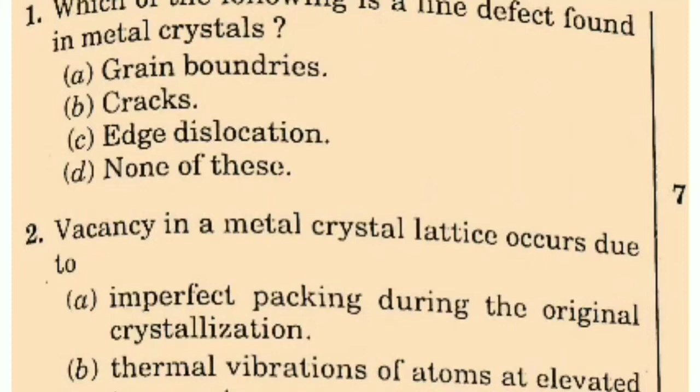Next, vacancy in a metal crystal lattice occur due to imperfect packing during the original crystallization, thermal vibration of atom at elevated temperature, or C both A and B, D neither A nor B? इसका सही आंसर है दोस्तों C, both A and B। Vacancy in a metal crystal lattice occur due to imperfect packing during the original crystallization, and thermal vibration of atom at elevated temperature।

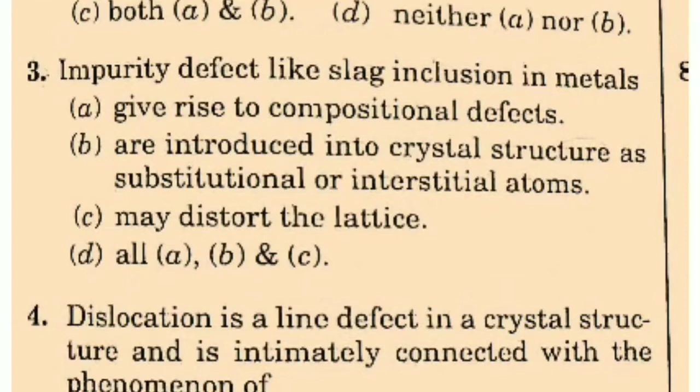Next, impurity defect like slag inclusion in metals give rise to compositional defect: are introduced into crystal structure as substitutional or interstitial atom, or C may distort the lattice, or D all of above? इसका सही आंसर है दोस्तों D, all of above। Impurity defect like slag inclusion in metal give rise to compositional defect, are introduced into crystal structure as substitutional or interstitial atoms, and may distort the lattice।

Next, dislocation is a line defect in a crystal structure and is intimately connected with the phenomenon of slip, strain hardening and creep, fatigue and brittle fracture, or D all of above? इसका सही आंसर दोस्तों all of above। Dislocation is a line defect in a crystal structure and is intimately connected with the phenomenon of slip, strain hardening and creep, fatigue and brittle fracture।

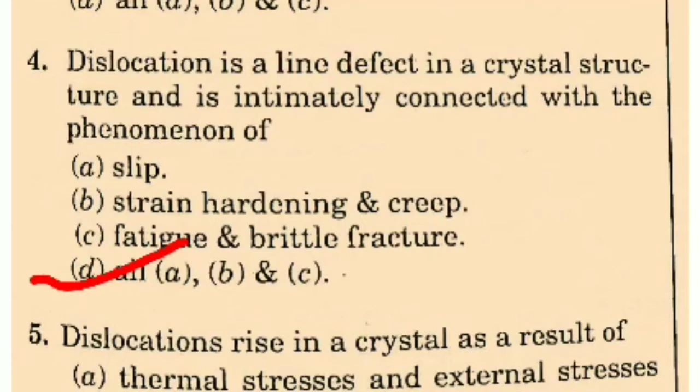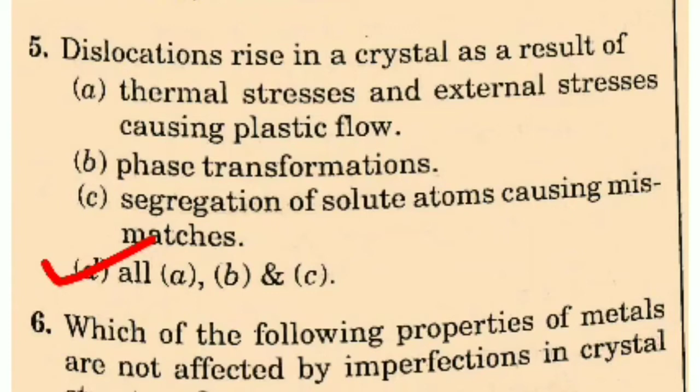Next, dislocation rise in a crystal as a result of thermal stress and external stress causing plastic flow, B phase transformation, C segregation of solute atom causing mismatch, or all of above? इसका सही आंसर है दोस्तों all of above। Dislocation rise in a crystal as a result of thermal stress and external stress causing plastic flow, phase transformation, and segregation of solute atom causing mismatches।

Next, which of the following properties of metals are not affected by imperfection in crystal structure? Plastic and creep characteristics, thermal and electrical conductivity, flow fracture and corrosion characteristics, or none of these? इसका सही आंसर है दोस्तों none of these।

Next, substitutional solid solution forms when the solute atom are very small compared to solvent atom, B solute and solvent atoms possess almost equal diameters, C solvent atoms are very small compared to solute atoms, or none of these? इसका सही आंसर है दोस्तों B, solute and solvent atom possess almost equal diameter। Substitutional solid solution forms when the solute and solvent atoms possess almost equal diameter।

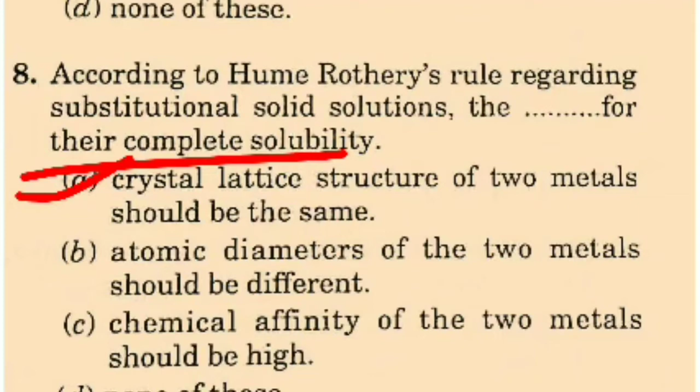Next is, according to Hume-Rothery's rule regarding substitutional solid solution, the dash for their complete solubility: A crystal lattice structure of two metals should be the same, atomic diameter of the two metals should be different, chemical affinity of the two metals should be high, or none of these? इसका सही आंसर है दोस्तों option A। According to Hume-Rothery's rules regarding substitutional solid solution, the crystal lattice structure of two metals should be the same for their complete solubility।

Next, metals with large valence electrons dash with a lower valence metal: have poor solubility, have very good solubility, are completely miscible, or are completely miscible only when the crystal lattice structure of the two metals are same? इसका सही आंसर है दोस्तों option A। Metals with large valence electrons with a lower valence metal have poor solubility।

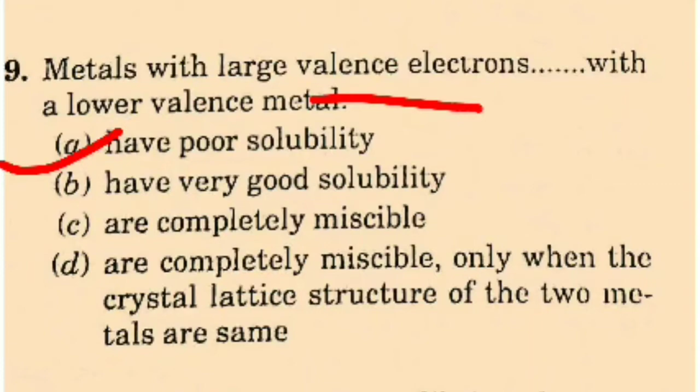Next, the line or surface in an equilibrium diagram which indicates the temperature of the beginning of solidification or completion of melting is called the dash temperature: solidus, liquidus, solidification, or melting? इसका सही आंसर है दोस्तों B, liquidus। The line or surface in an equilibrium diagram which indicates the temperature of the beginning of solidification or completion of melting is called the liquidus temperature।

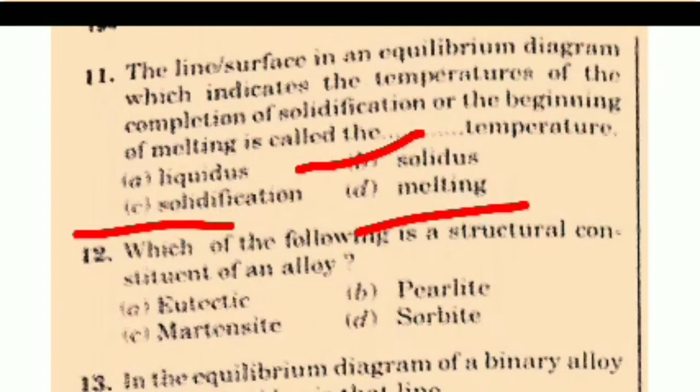Next, the line or surface in an equilibrium diagram which indicates the temperature of the completion of solidification or the beginning of melting is called the dash temperature: liquidus, solidus, solidification, or melting? इसका सही आंसर है दोस्तों option B, solidus। The line or surface in an equilibrium diagram which indicate the temperature of the completion of solidification or the beginning of melting is called the solidus temperature।

Next, which of the following is a structural constituent of an alloy? Eutectic, pearlite, martensite, or sorbite? इसका सही आंसर है A, eutectic। Which of the following is a structural constituent of an alloy? इसका सही आंसर है eutectic।

Next, in the equilibrium diagram of a binary alloy system, liquidus is that line where solidification completes, where solidification starts, above which the alloy is in liquid state, or both B and C? इसका सही आंसर है all of B, both B and C।

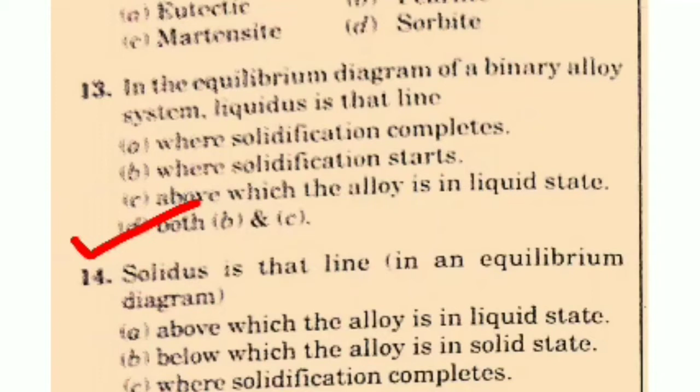Solidus is that line in an equilibrium diagram below which the alloy is in solid state, where solidification completes.

Next, which one involves a solid transformation? Eutectic, perlitic, eutectoid, or none of these. The correct answer is eutectoid. Which one involves a solid transformation? The correct answer is eutectoid.

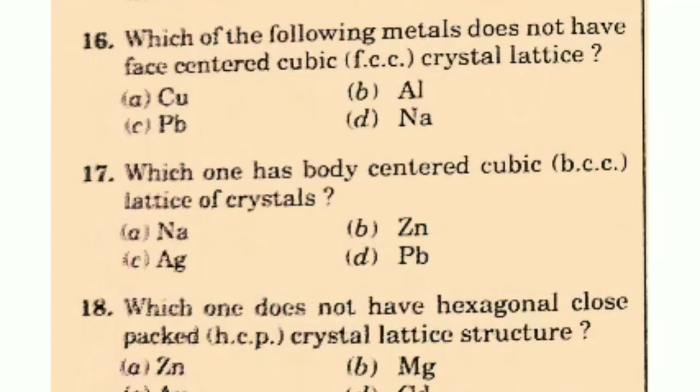Next, which of the following metals does not have face centered cubic FCC crystal lattice? Copper, aluminium, PB, or Na? The correct answer is D, sodium. Which of the following metal does not have face centered cubic FCC crystal lattice? The correct answer is Na.

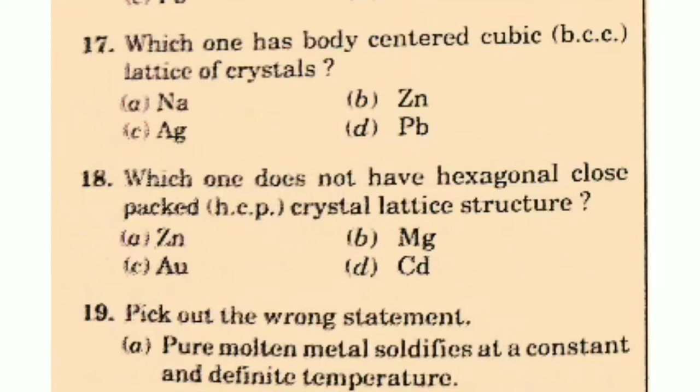Which one has body centered cubic BCC lattice of crystal? Na, Zn, Ag, or Pb? The correct answer is option A, Na. Which one has body centered cubic BCC lattice of crystal? The correct answer is sodium.

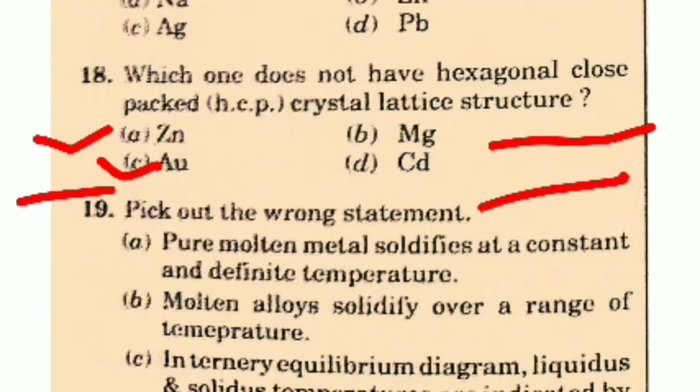Next, which one does not have hexagonal close packed crystal lattice structure? Zn, Mg, Au, or Cd? The correct answer is C, Au. Which one does not have hexagonal close packed crystal lattice structure? The correct answer is C, Au.

Pick out the wrong statement. A. Pure molten metal solidifies at a constant and definite temperature. B. Molten alloy solidifies over a range of temperature. C. In a ternary equilibrium diagram, liquidus and solidus temperature are indicated by surface, not by lines. Or D, none of these. The correct answer is D, none of these.

Pick out the wrong statement. Pure molten metal solidifies at a constant and definite temperature. Molten alloy solidifies over a range of temperature. In a ternary equilibrium diagram, liquidus and solidus temperature are indicated by surface, not by line. The correct answer is none of these, D.

Next, allotropic forms of metal have the same physical properties, crystal structure, or both A and B? D, neither A nor B. The correct answer is neither A nor B, option D. Allotropic forms of metal have the same physical properties, crystal structure. The correct answer is D, neither A nor B.

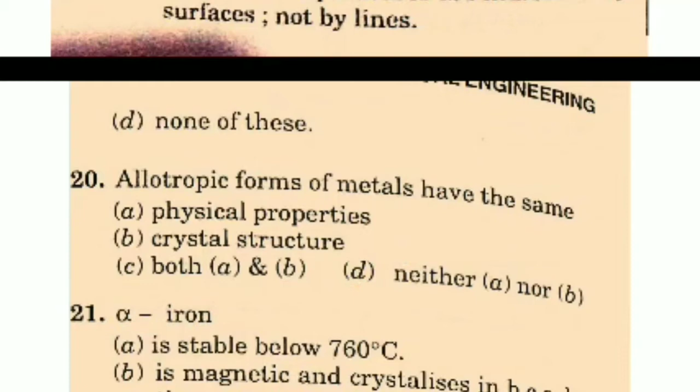Next, alpha iron is stable below 760 degrees centigrade, is magnetic, and crystallizes in BCC lattice. It has only 0.025% solubility for carbon. The correct answer is all of the above. Alpha iron is stable below 760 degrees centigrade, is magnetic and crystallized in BCC lattice. It has only 0.025% solubility for carbon.

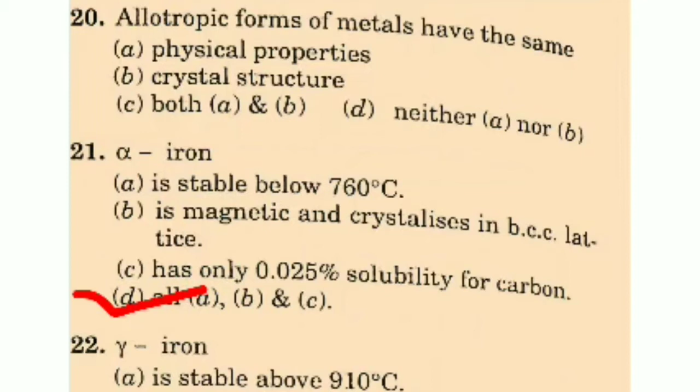Next, gamma iron is stable above 910 degrees centigrade, is non-magnetic and has FCC lattice. It can hold up to 2% carbon in solution. The correct answer is D, all of the above.

Gamma iron is stable above 910 degrees centigrade, is non-magnetic and has FCC lattice. It can hold up to 2% carbon in solution. The correct answer is all of the above.

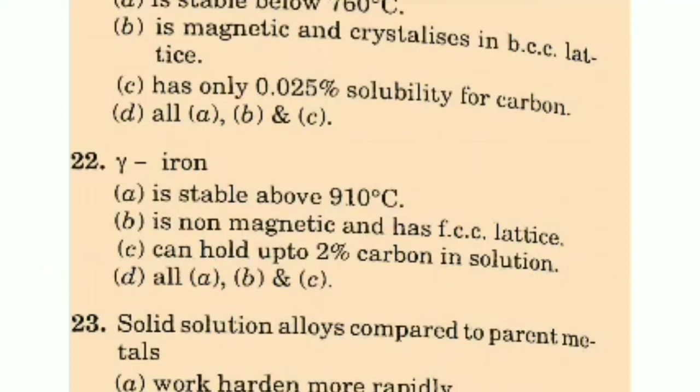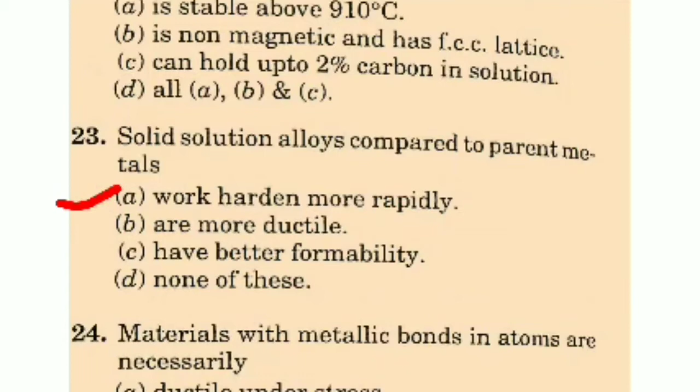Solid solution alloy compared to parent metals: work harden more rapidly, more ductile, have better formability, or none of these? The correct answer is option A. Solid solution alloy compared to parent metals work harden more rapidly.

Materials with metallic bonds in atoms are necessarily ductile under stress.

Next, solids having covalent bonds have high electrical conductivity, low electrical conductivity, high hardness, or both B and C. The correct answer is D, both B and C. Solids having covalent bonds have low electrical conductivity and high hardness.

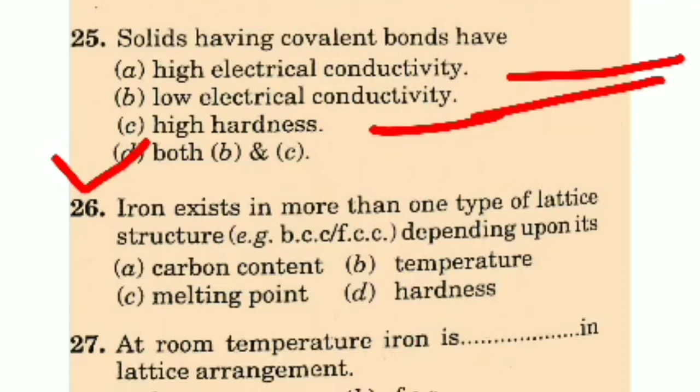Next, iron exists in more than one type of lattice structure, that is BCC or FCC, depending upon its carbon content, temperature, melting point, or hardness. The correct answer is option B, temperature. Iron exists in more than one type of lattice structure, that is BCC or FCC, depending upon its temperature.

Next, at room temperature, iron is dash in lattice arrangement: BCC, FCC, HCP, or none of these. The correct answer is BCC. At room temperature, iron is BCC in lattice arrangement.

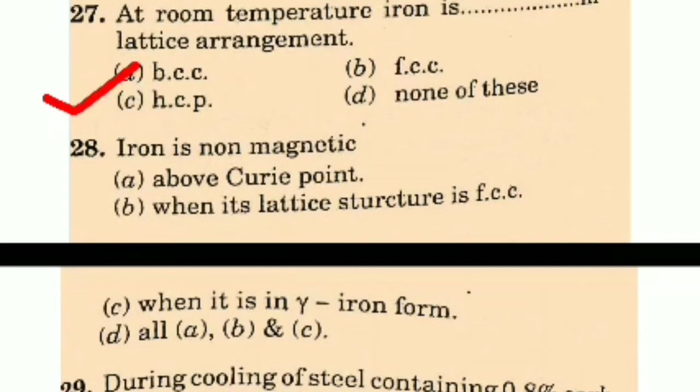Next, iron is non-magnetic above the Curie point when its lattice structure is FCC, when it is in gamma iron form, or D, all of the above. The correct answer is all of the above.

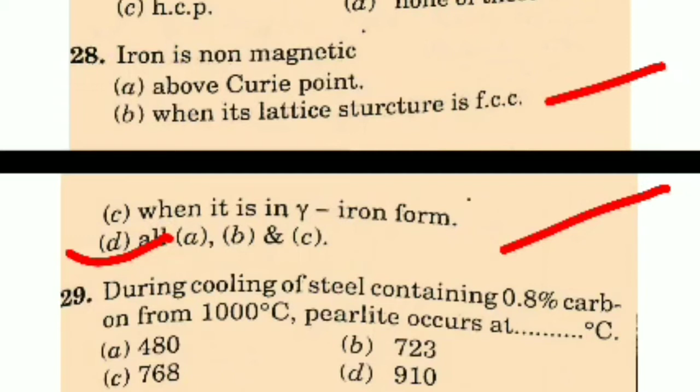Iron is non-magnetic above Curie point when its lattice structure is FCC, when it is in gamma iron form.

During cooling of steel containing 0.8% carbon from 1000 degree centigrade, pearlite occurs at what temperature: 480, 723, 768 or 910? The correct answer is 723. During cooling of steel containing 0.8% carbon from 1000 degree centigrade, pearlite occurs at 723 degree centigrade. Next, nodular iron has got very high tensile strength of the order of how many kilograms per centimeter square?

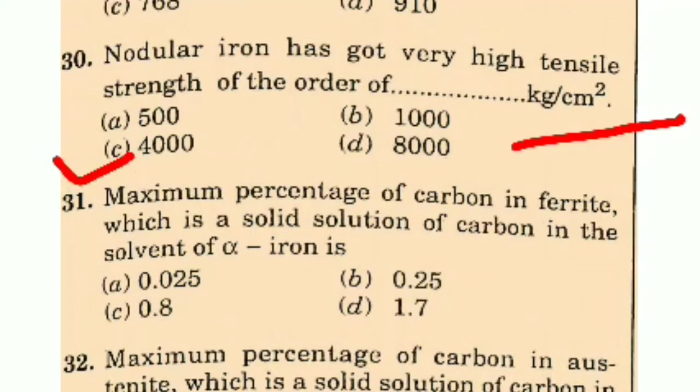The correct answer is option C, 4000 kg per centimeter square. Nodular iron has got very high tensile strength of the order of 4000 kg per centimeter square.

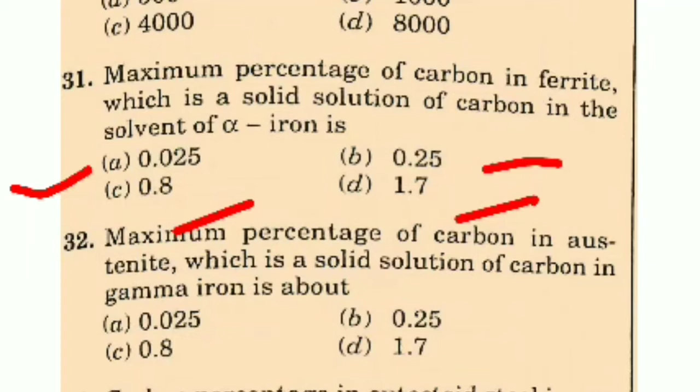Maximum percentage of carbon in ferrite, which is a solid solution of carbon in the solvent of alpha iron, is: 0.025, 0.25, 0.8 or 1.7? The correct answer is option A. Maximum percentage of carbon in ferrite, which is a solid solution of carbon in the solvent of alpha iron, is 0.025. Next, maximum percentage of carbon in austenite which is a solid solution of carbon in gamma iron is about:

0.025, 0.25, 0.8 or 1.7? The correct answer is D, 1.7. The maximum percentage of carbon in austenite which is a solid solution of carbon in gamma iron is about 1.7%.

Next, carbon percentage in eutectoid steel is 0.025, 0.25, 0.8 or 1.7? The correct answer is C, 0.8%. Carbon percentage in eutectoid steel is 0.8%.

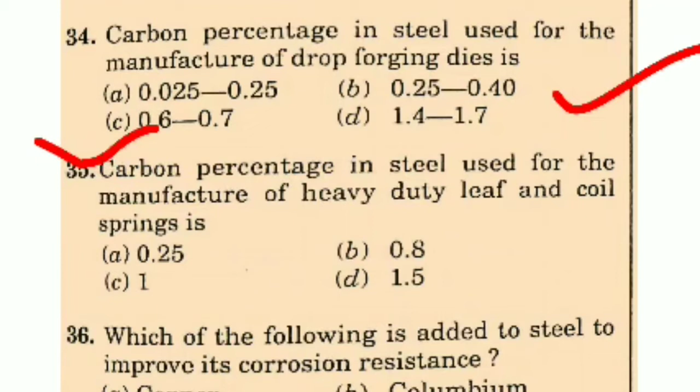Next, carbon percentage in steel used for the manufacture of drop forging dies is 0.025 to 0.25, or 0.25 to 0.40, or 0.6 to 0.7, or 1.4 to 1.7? The correct answer is option C, 0.6 to 0.7. Carbon percentage in steel used for the manufacture of drop forging dies is 0.6 to 0.7.

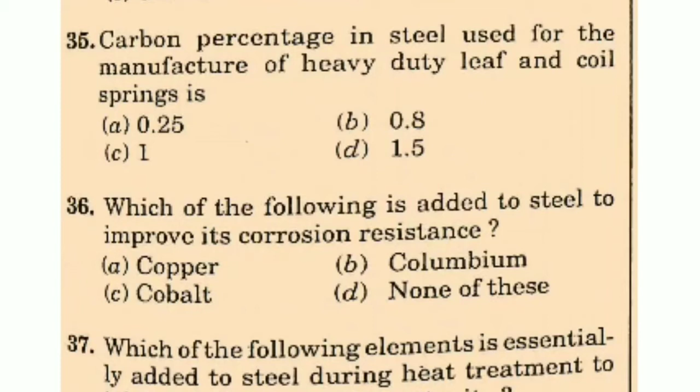Next, carbon percentage in steel used for the manufacture of heavy duty leaf and coil spring is 0.25, 0.8, 1 or 1.5? The correct answer is option C, 1. Carbon percentage in steel used for the manufacture of heavy duty leaf and coil spring is 1.

Next, which of the following is added to steel to improve its corrosion resistance: copper, columbium, cobalt or none of these? The correct answer is none of these. To improve corrosion resistance, chromium is generally used.

Next, which of the following elements is essentially added to steel during heat treatment to inhibit grain growth in austenite: tin, aluminum, copper or brass? The correct answer is option B, aluminum. Which of the following elements is essentially added to steel during heat treatment to inhibit grain growth in austenite? The answer is aluminum.

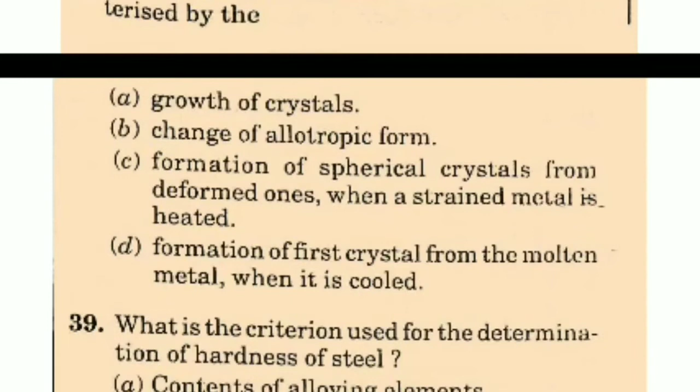Next, recrystallization temperature is characterized by: growth of crystal, change of allotropic form, formation of spherical crystal from deformed ones when a strained metal is heated, or formation of first crystal from the molten metal when it is cooled? The correct answer is option C. Recrystallization temperature is characterized by the formation of spherical crystal from deformed ones when a strained metal is heated.

Next, what is the criterion used for the determination of hardness of steel: contents of alloying element, carbon content, method of steel production, or shape and distribution of carbide in iron? The correct answer is option D. What is the criterion used for the determination of hardness of steel? Shape and distribution of carbide in iron.

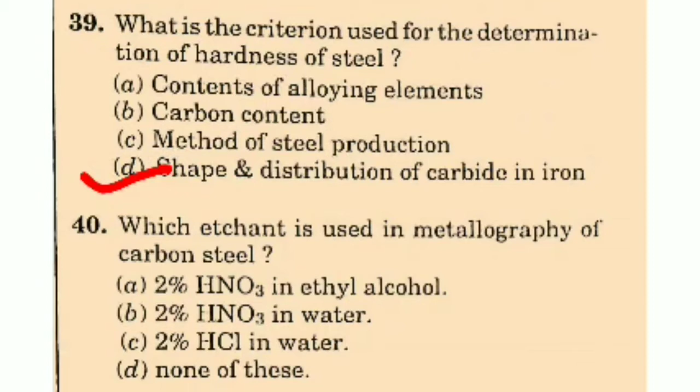Next, which etchant is used in metallography of carbon steel: 2% HNO3 in ethyl alcohol, 2% HNO3 in water, 2% HCl in water, or none of these? The correct answer is option A. Which etchant is used in metallography of carbon steel? 2% HNO3 in ethyl alcohol.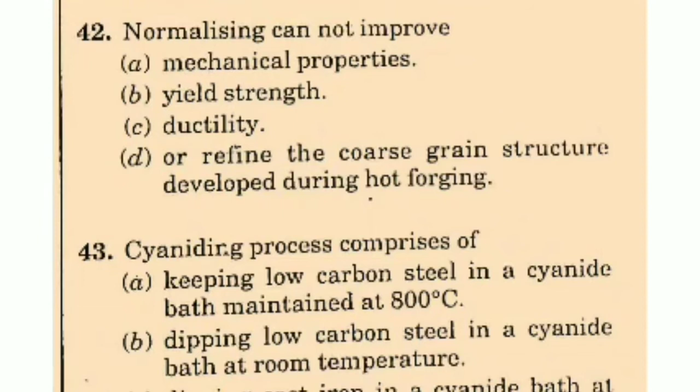Next, cyaniding process comprises of: keeping low carbon steel in a cyanide bath maintained at 800 degree centigrade, dipping low carbon steel in a cyanide bath at room temperature, dipping cast iron in a cyanide bath at 400 degree centigrade, or dipping a non-ferrous metal in a cyanide bath at 400 degree centigrade? The correct answer is option A. Cyaniding process comprises of dipping low carbon steel in a cyanide bath maintained at 800 degree centigrade.

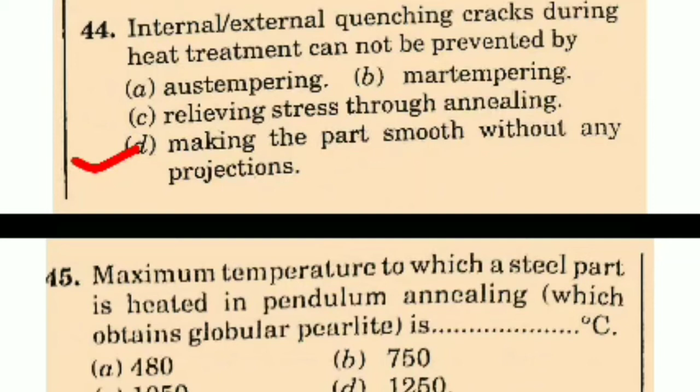Next, internal or external quenching crack during heat treatment cannot be prevented by: austempering, martempering, relieving stress through annealing, or making the part smooth without any projection? The correct answer is option D. Internal or external quenching crack during heat treatment cannot be prevented by making the part smooth without any projection.

Next, maximum temperature to which a steel part is heated in pendulum annealing, which obtains globular pearlite, is how many degree centigrade?

इसका सही आंसर है ऑप्शन बी 750 डिग्री सेंटीग्रेड। Maximum temperature to which a steel part is heated in pendulum annealing is 750 degree centigrade.

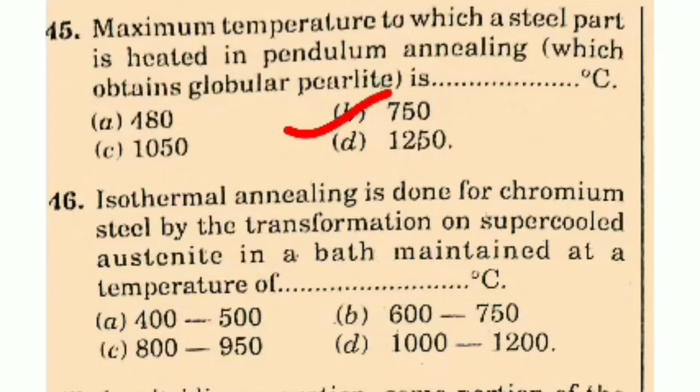Isothermal annealing is done for chromium steel by the transformation of supercooled austenite in a bath maintained at a temperature of 400 से 500, 600 से 750, 800 से 950 या 1000 से 1200 डिग्री सेंटीग्रेड। इसका सही आंसर है ऑप्शन बी 600 से 750 डिग्री सेंटीग्रेड।

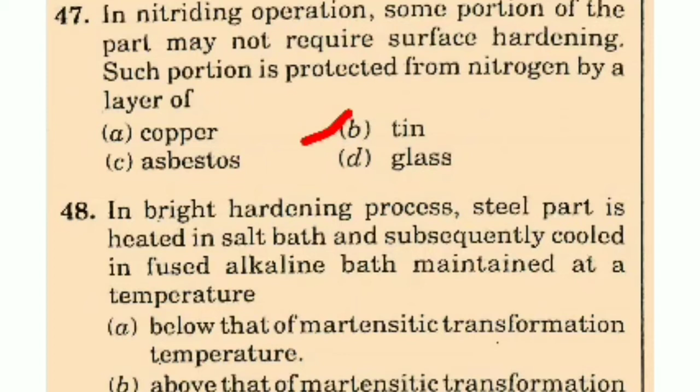In nitriding operation some portion of the part may not require surface hardening। Such portion is protected from nitrogen by a layer of copper, tin, asbestos या glass। इसका सही आंसर है ऑप्शन बी tin।

In bright hardening process, steel part is heated in salt bath and subsequently cooled in fused alkaline bath maintained at a temperature below that of martensitic transformation temperature, above that of martensitic transformation temperature, 150 डिग्री सेंटीग्रेड above that of upper critical temperature या none of these। इसका सही आंसर है ऑप्शन ए, below that of martensitic transformation temperature।

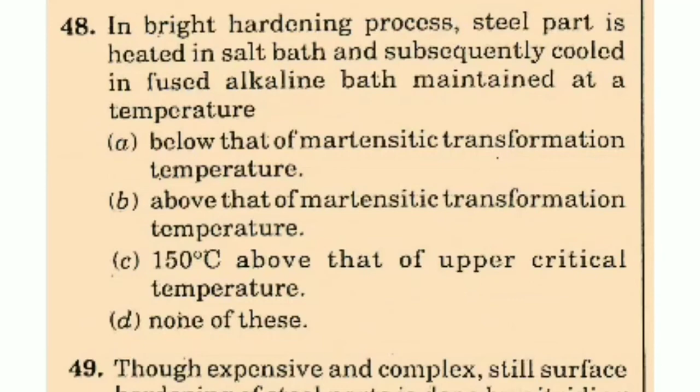Though expensive and complex, still surface hardening of steel parts is done by nitriding operation, mainly due to the fact that a high production rate can be achieved, quenching is not involved, only 800 degree centigrade furnace temperature is required, or there is no distortion of the furnace part। इसका सही आंसर है ऑप्शन बी, quenching is not involved।

Which of the following materials get diffused in the surface layer of the steel parts subjected to nitriding operation for increasing its wear resistance property? Monoatomic nitrogen, molecular nitrogen, ammonia या none of these? इसका सही आंसर है ऑप्शन ए, मोनोएटॉमिक नाइट्रोजन।

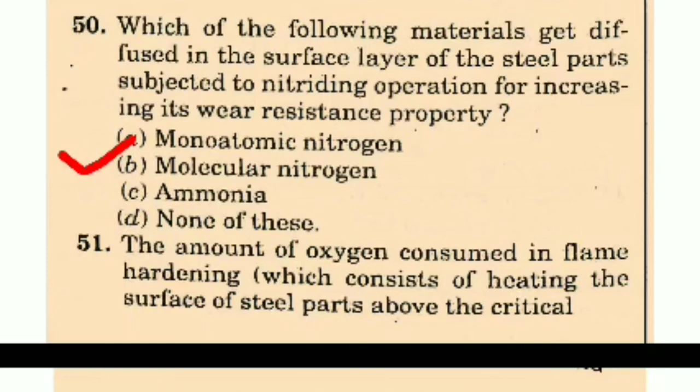The amount of oxygen consumed in flame hardening, which consists of heating the surface of steel parts above the critical temperature by an oxyacetylene torch followed by sudden cooling, is directly proportional to, inversely proportional to, directly proportional to square root of, or inversely proportional to the square root of the thickness of the hardened layer। इसका सही आंसर है ऑप्शन सी, directly proportional to square root of the thickness of the hardened layer।

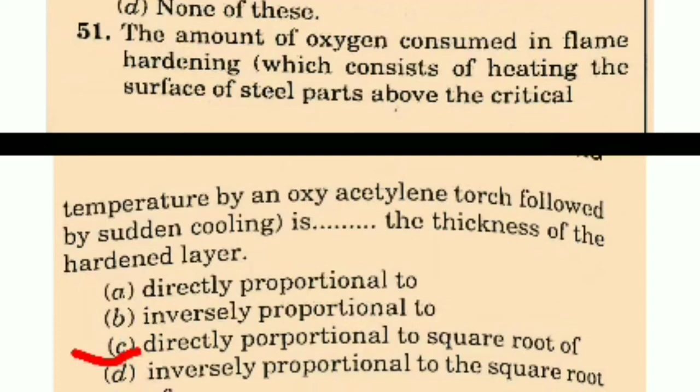A steel part was hardened and then tempered to remove brittleness, but subsequently it was found that the part has very poor hardness। It may be due to tempering done at 150, 350, 550 या 800 degree centigrade। इसका सही आंसर है 800 डिग्री सेंटीग्रेड।

Surface hardening of steel part in an electrolytic bath containing sodium carbonate is based on a physical phenomenon called cathode effect, कोरोना डिस्चार्ज या इलेक्ट्रोलाइसिस, none of these। इसका सही आंसर है ऑप्शन ए, कैथोड इफेक्ट।

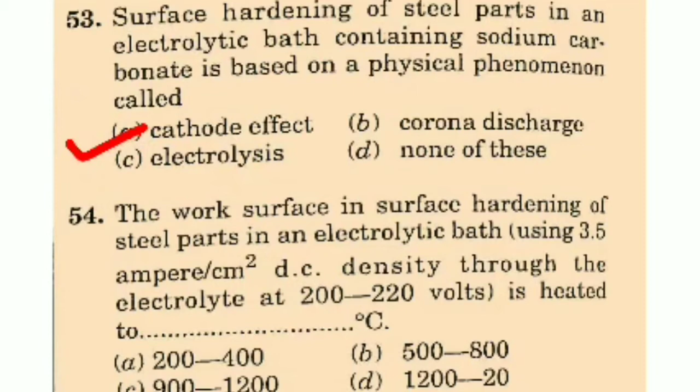The work surface in surface hardening of steel part in an electrolytic bath using 3.5 ampere per centimeter square DC density through the electrolyte at 200 से 220 volt is heated to degree centigrade। इसका सही आंसर है 1200 से 2000 डिग्री सेंटीग्रेड, ऑप्शन डी।

A steel part is placed in a varying magnetic field which induces an eddy current to heat it in the induction hardening process। If the depth to which the part is to be hardened is limited to 1/10 of its diameter, then the relation between frequency in cycle per second and diameter is equal to 2,50,000 per D square। यही है इसका सही आंसर, ऑप्शन है।

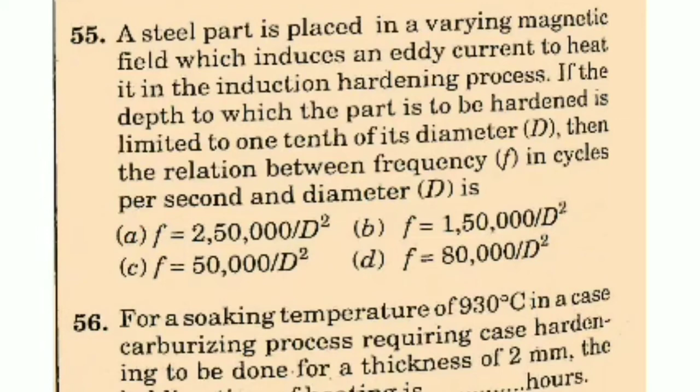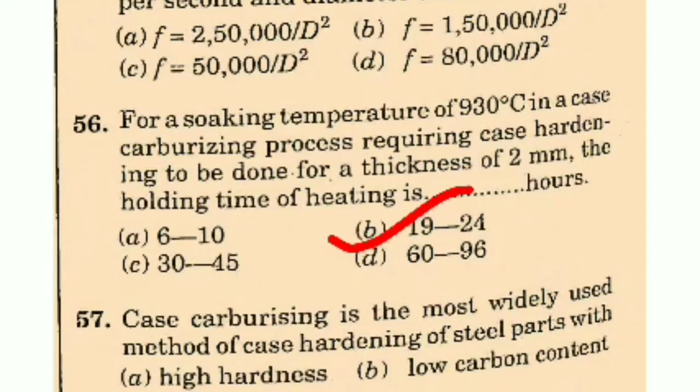For a soaking temperature of 930 degrees centigrade in a case carburizing process requiring case hardening to be done for a thickness of 2 millimeter, the holding time of heating is dash hour। इसका सही आंसर है ऑप्शन बी 19 से 24 आवर्स। For a soaking temperature of 930 degrees centigrade in a case carburizing process requiring case hardening to be done for a thickness of 2 millimeter, the holding time of heating is 19 से 24 आवर।

Case carburizing is the most widely used method of case hardening of steel part with high hardness, low carbon content, low tensile strength या high corrosion resistance। इसका सही आंसर है ऑप्शन बी लो कार्बन कंटेंट।

In order to overcome warping, which is a problem caused during quenching of slender parts like taps, drills, etc., the articles should be quenched in an vertical manner with cutting end touching first to the quenching medium या inclined manner with the cutting end touching last to the quenching medium या horizontal manner। इसका सही आंसर है ऑप्शन ए। In order to overcome warping, which is a problem caused during quenching of slender parts like taps, drills, etc., the article should be quenched in an vertical manner with cutting end touching first to the quenching medium।

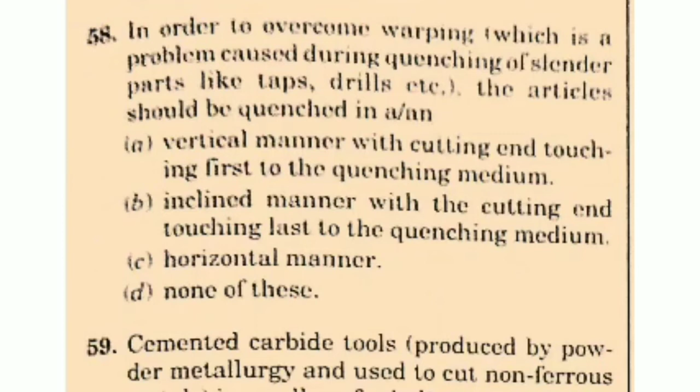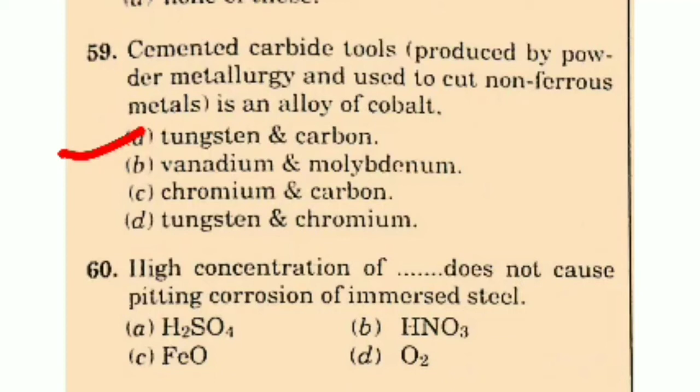Cemented carbide tools produced by powder metallurgy and used to cut non-ferrous metals is an alloy of cobalt, tungsten and carbon, vanadium and molybdenum, chromium and carbon या tungsten and chromium। यह सही आंसर है ऑप्शन ए tungsten and carbon। Cemented carbide tools produced by powder metallurgy and used to cut non-ferrous metal is an alloy of cobalt, tungsten and carbon।

High concentration of dash does not cause pitting corrosion of immersed steel: H2SO4, HNO3, FeO या O2। इसका सही आंसर है ऑप्शन बी HNO3। High concentration of HNO3 does not cause pitting corrosion of immersed steel।

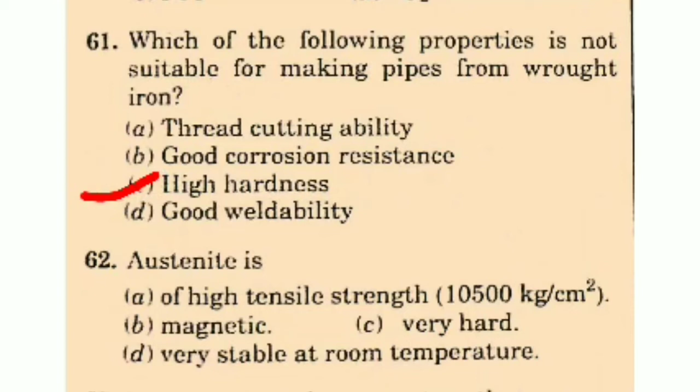Which of the following properties is not suitable for making pipes from wrought iron? Thread cutting ability, good corrosion resistance, high hardness या good weldability। इसका सही आंसर है ऑप्शन सी हाई हार्डनेस। Which of the following properties is not suitable for making pipes from wrought iron? इसका सही आंसर है high hardness।

Austenite is of high tensile strength, magnetic, very hard, very stable at room temperature। इसका सही आंसर है ऑप्शन ए हाई टेंसाइल स्ट्रेंथ। Austenite is high tensile strength।

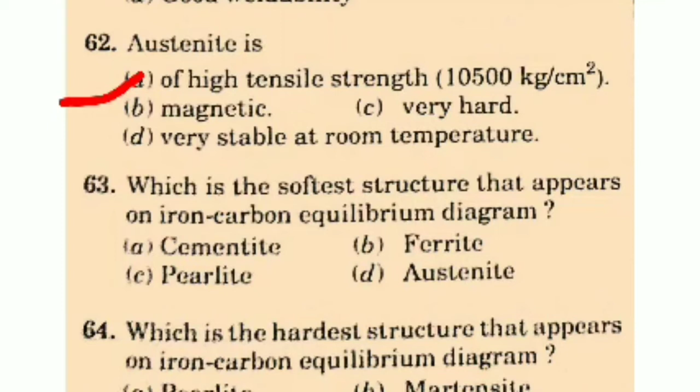Which is the softest structure that appear on iron carbon equilibrium diagram? सीमेंटाइट, फेराइट, परलाइट या ऑस्टेनाइट। इसका सही आंसर है ऑप्शन बी फेराइट। Which is the softest structure that appears on iron carbon equilibrium diagram? इसका सही आंसर है फेराइट।

Which is the hardest structure that appears on iron carbon equilibrium diagram? परलाइट, मार्टेनसाइट, सीमेंटाइट या ऑस्टेनाइट? इसका सही आंसर है ऑप्शन सी सीमेंटाइट। Which is the hardest structure that appears on iron carbon equilibrium diagram? इसका सही आंसर है सीमेंटाइट।

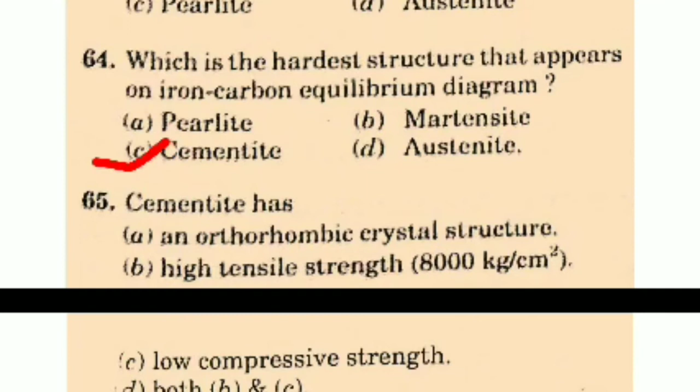Cementite has an orthorhombic crystal structure, high tensile strength 8000 kg per centimeter square, या low compressive strength, या डी both B and C? इसका सही आंसर है ऑप्शन ए an orthorhombic crystal structure। Cementite has an orthorhombic crystal structure।

Next, ledeburite contain 4.3% carbon, is formed at 1130 degree centigrade, is the eutectic mixture of austenite and cementite, या all of above? इसका सही आंसर है all of above। Ledeburite contain 4.3% carbon, is formed at 1130 degree centigrade, is the eutectic mixture of austenite and cementite।

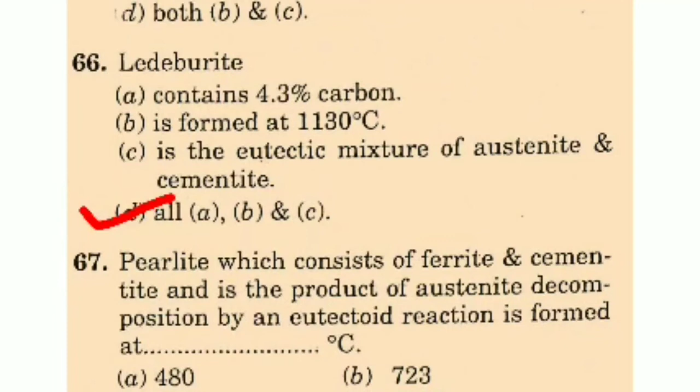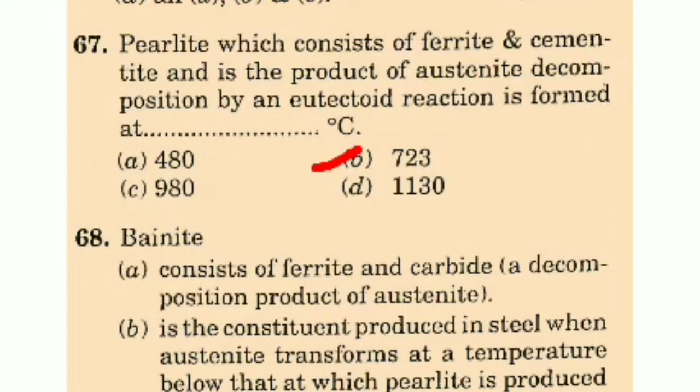Next, परलाइट, which consists of ferrite and cementite and is the product of austenite decomposition by an eutectoid reaction, is formed at dash degree centigrade। इसका सही आंसर है ऑप्शन बी 723 डिग्री सेंटीग्रेड। परलाइट, which consists of ferrite and cementite and is the product of austenite decomposition by an eutectoid reaction, is formed at 723 degree centigrade।

Bainite consists of ferrite and carbide and decomposition product of austenite। B is the constituent product in steel when austenite transforms at a temperature below that at which pearlite is produced and above that at which martensite is formed। C is produced by austempering। D all of above? इसका सही आंसर है all of above। Bainite consists of ferrite and carbide and decomposition product of austenite, is the constituent produced in steel when austenite transforms at a temperature below that at which pearlite is produced and above that at which martensite is formed, is produced by austempering। इसका सही आंसर है all of above।

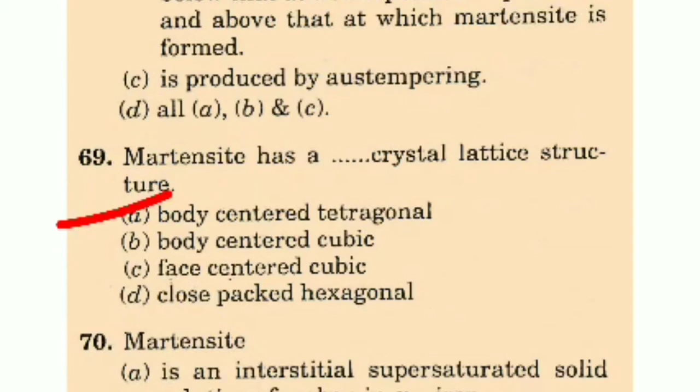Next, martensite has a dash crystal lattice structure: body center tetragonal, body center cubic, face center cubic, close packed hexagonal। इसका सही आंसर है body center tetragonal। Martensite has a body center tetragonal crystal lattice structure।

Next, martensite is an interstitial supersaturated solid solution of carbon in alpha iron, possess a needle-like structure and is a product of quenching। B is formed as a result of shear type transformation with no diffusion। D all of above? इसका सही आंसर है D all of above। Martensite is an interstitial supersaturated solid solution of carbon in alpha iron, possess a needle-like structure and is a product of quenching, is formed as a result of shear type transformation with no diffusion। All of above।

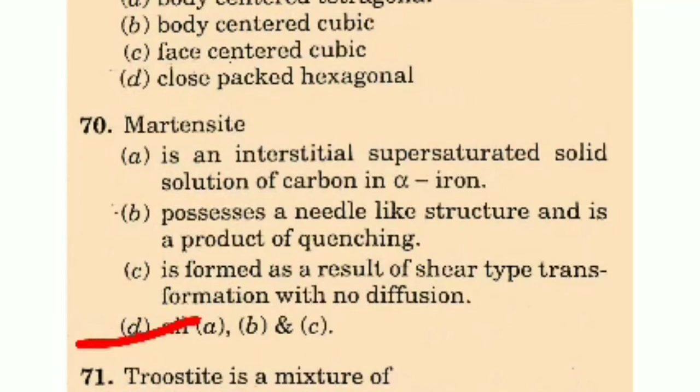Next, troostite is a mixture of: ferrite and austenite, martensite, ferrite and cementite, या none of these? इसका सही आंसर है ऑप्शन सी ferrite and cementite।

Troostite is a mixture of ferrite and cementite. Tempering of martensite below 450 degree centigrade produces troostite, ferrite, cementite, or martensite. The correct answer is option A, troostite.

Which of the following is not a mixture of ferrite and cementite? Pearlite, sorbite, troostite, or none of these. The correct answer is option D, none of these.

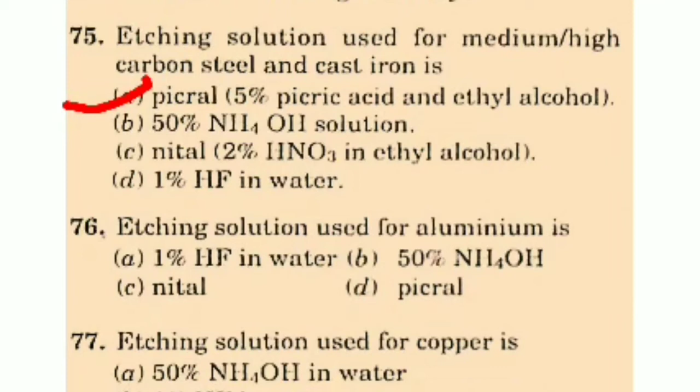Etching solution used for aluminum is 1% HF in water, 50% NH4OH, nital, or picral. The correct answer is option A, 1% HF in water.

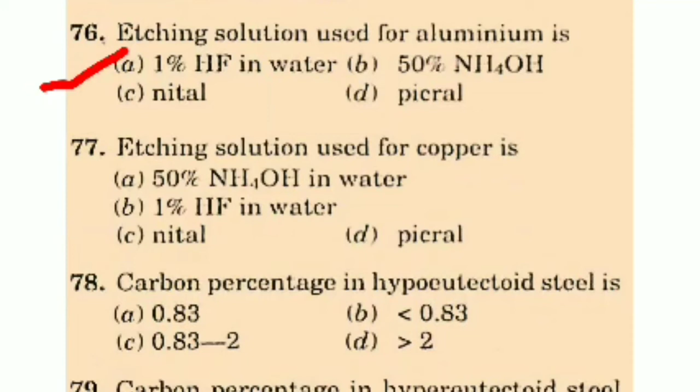Etching solution used for copper is 50% NH4OH in water, 1% HF in water, nital, or picral. The correct answer is option A, 50% NH4OH in water.

Carbon percentage in hypoeutectoid steel is 0.83, less than 0.83, 0.83 to 2%, or greater than 2. The correct answer is option B, less than 0.83. Carbon percentage in hypoeutectoid steel is less than 0.83.

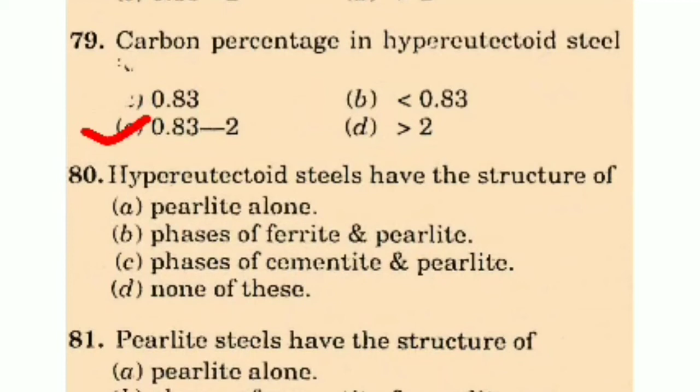Hypereutectoid steel has the structure of pearlite alone, phase of ferrite and pearlite, phase of cementite and pearlite, or none of these. The correct answer is option C, phase of cementite and pearlite. Hypereutectoid steel has the structure of cementite and pearlite.

Pearlite steel has the structure of pearlite alone, phase of cementite and pearlite, phase of ferrite and pearlite, or none of these. The correct answer is option A, pearlite alone. Pearlite steel has the structure of pearlite alone.

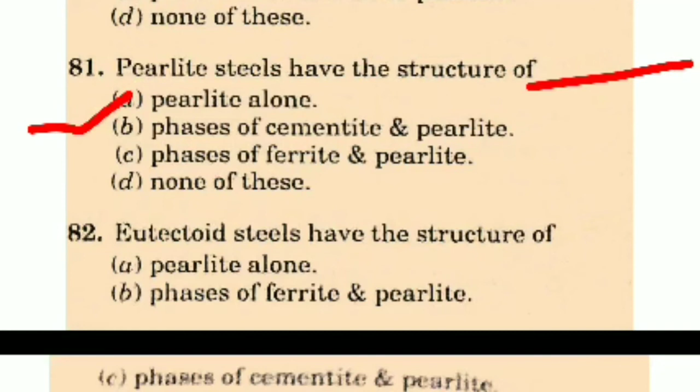Eutectoid steel has the structure of pearlite alone, phase of ferrite and pearlite, phase of cementite and pearlite, or none of these. The correct answer is option A, pearlite alone. Eutectoid steel has the structure of pearlite alone.

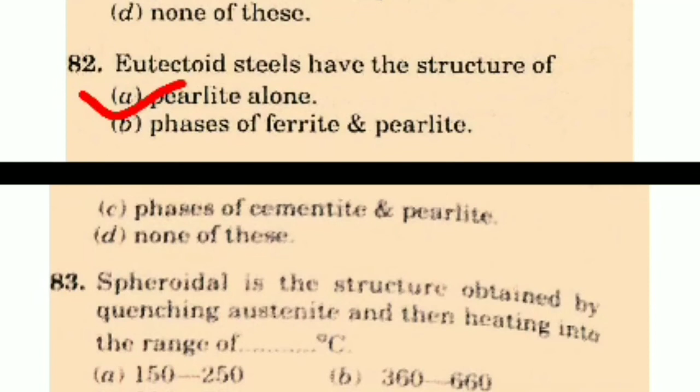Spheroidal is the structure obtained by quenching austenite and then heating into the range of blank degree centigrade: 150 to 250, 360 to 660, 660 to 700, or 980 to 1120. The correct answer is option C, 660 to 700 degree centigrade.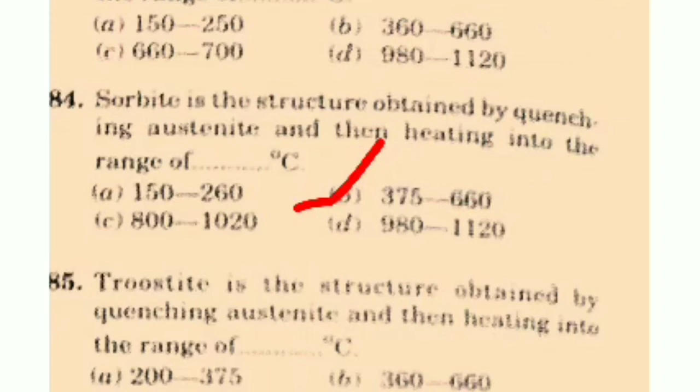Sorbite is the structure obtained by quenching austenite and then heating into the range of blank degree centigrade. The correct answer is option B, 375 to 660 degree centigrade.

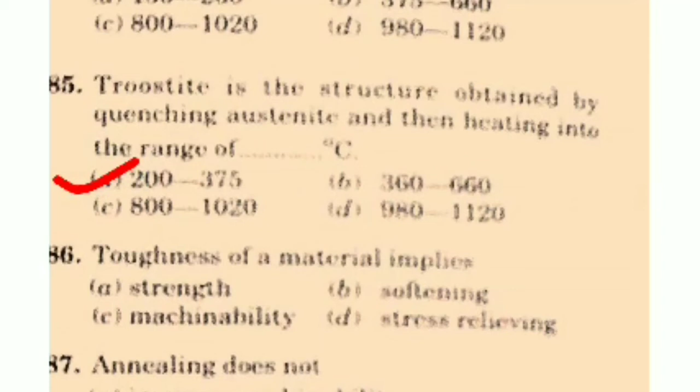Troostite is the structure obtained by quenching austenite and then heating into the range of blank degree centigrade. The correct answer is option A, 200 to 375 degree centigrade.

Toughness of a material implies strength, softening, machinability, or stress relieving. The correct answer is option A, strength. Toughness of a material implies strength.

Annealing does not improve machinability, remove coarseness of grain, relieve material stress induced by uneven cooling, or none of these. The correct answer is option D, none of these. Annealing does improve machinability, remove coarseness of grain, and relieve internal stress induced by uneven cooling.

Annealing treatment is not applied to forgings, casting, cold work sheet and wire, or none of these. The correct answer is option D, none of these. Annealing treatment is applied to forgings, casting, and cold worked sheet and wire.

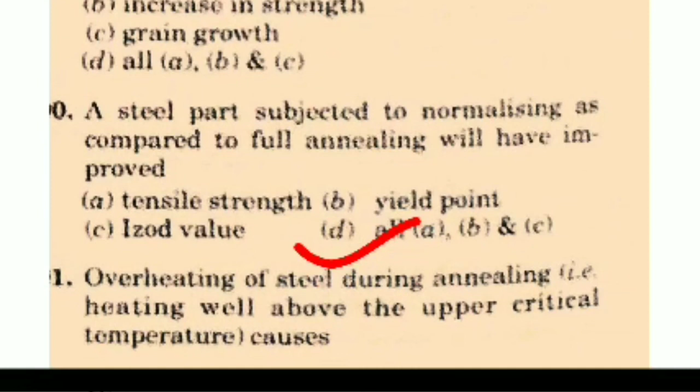A steel part subjected to normalizing as compared to full annealing will have improved tensile strength, yield point, Izod value, or all of above? The correct answer is all of above. A steel part subject to normalizing as compared to full annealing will have improved tensile strength, yield point, Izod value, all of above.

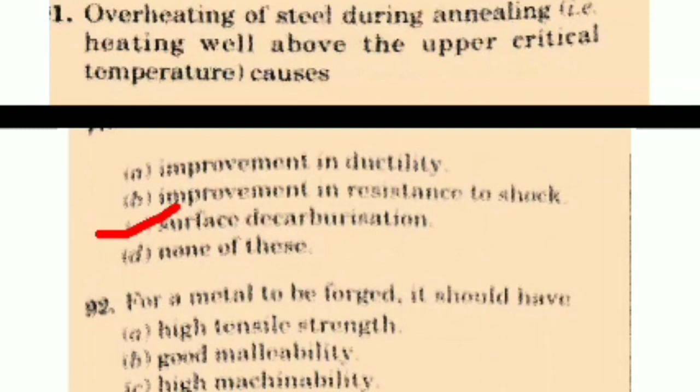Overheating of steel during annealing, that is heating well above the upper critical temperature, causes improvement in ductility, improvement in resistance to shock, surface decarburization, or none of these? The correct answer is C, surface decarburization. Overheating of steel during annealing causes surface decarburization.

For a metal to be forged, it should have high tensile strength, good malleability, high machinability, or low Izod value? The correct answer is option B, good malleability. For a metal to be forged it should have good malleability.

Heat treatment of steel involves the change of ferrite to austenite, austenite to ferrite, a body centered cubic iron lattice to a face centered cubic iron lattice, or none of these. The correct answer is option B, austenite to ferrite. Heat treatment of steel involves the change of austenite to ferrite.

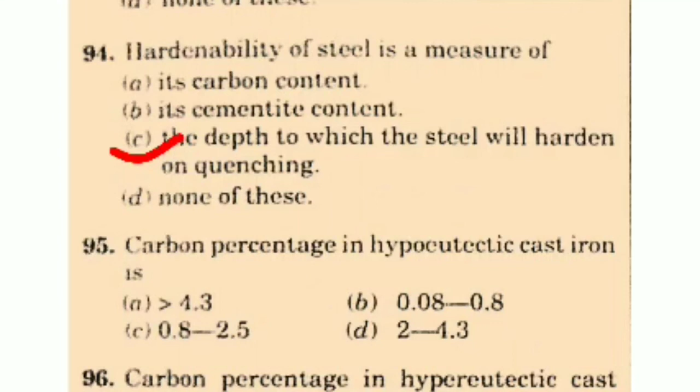Hardenability of steel is a measure of its carbon content, its cementite content, the depth to which the steel will harden on quenching, or none of these. The correct answer is option C. Hardenability of steel is a measure of the depth to which the steel will harden on quenching.

Carbon percentage in hypoeutectic cast iron is greater than 4.3, or 0.08 to 0.8, or 0.8 to 2.5, or 2 to 4.3? The correct answer is option D. Carbon percentage in hypoeutectic cast iron is 2 to 4.3. Next, carbon percentage in hypereutectic cast iron is... the correct answer is option B, greater than 4.3.

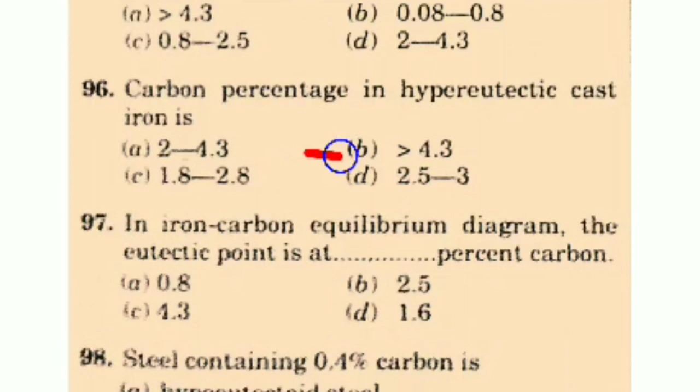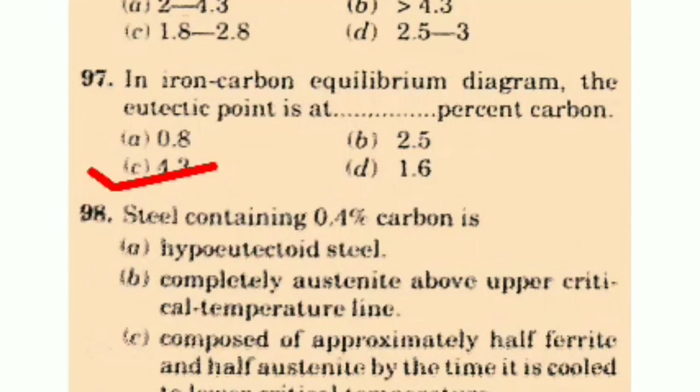In the iron carbon equilibrium diagram, the eutectic point is at what percent carbon: 0.8, 2.5, 4.3, or 1.6? The correct answer is option C, 4.3. In the iron carbon equilibrium diagram the eutectic point is at 4.3% carbon.

Steel containing 0.4% carbon is hypoeutectoid steel completely austenite above the upper critical temperature line, or composed of approximately half ferrite and half austenite by the time it is cooled to lower critical temperature, or all of above? The correct answer is all of above. Steel containing 0.4% carbon is hypoeutectoid steel completely austenite above upper critical temperature line, composed of approximately half ferrite and half austenite by the time it is cooled to lower critical temperature, all of above.

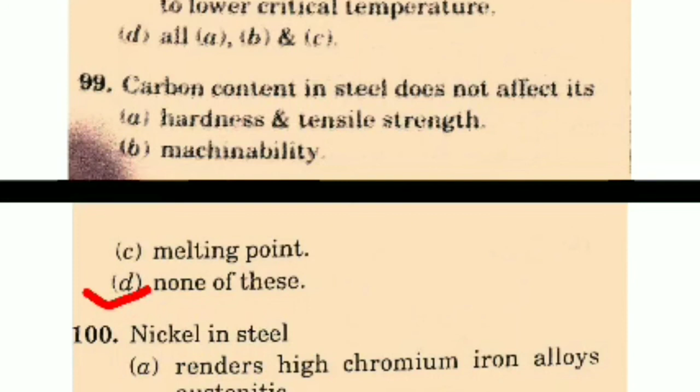Carbon content in steel does not affect its hardness and tensile strength, machinability, melting point, or none of these? The correct answer is option D, none of these. Carbon content in steel does not affect its hardness and tensile strength, machinability, melting point, and none of these. Same answer, none of these.

Nickel in steel renders high chromium iron alloy austenitic, increase distortion in quenching, decrease toughness and resistance to impact, or unites with carbon? The correct answer is option A. Nickel in steel renders high chromium iron alloy austenitic.

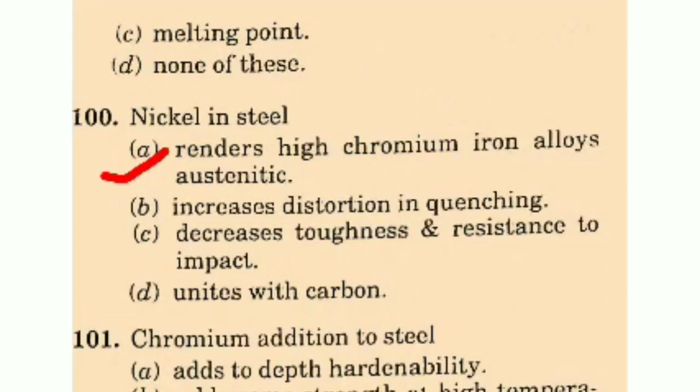Chromium addition to steel adds to depth, hardenability, adds some strength at high temperature, improves resistance to abrasion, wear, corrosion and oxidation, or all of these? The correct answer is option D, all of above. Chromium addition to steel adds to depth, hardenability, adds some strength at high temperature, improves resistance to abrasion, wear, corrosion and oxidation.

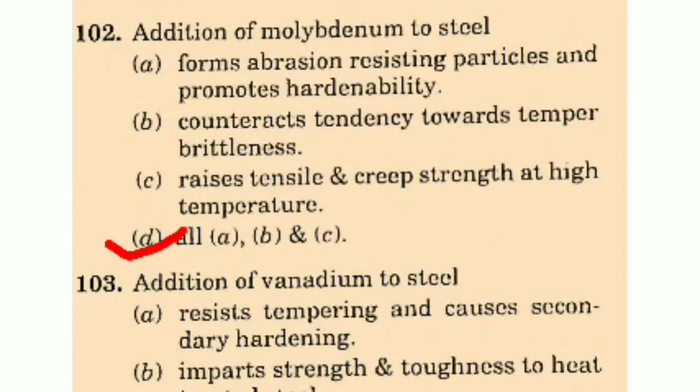Addition of molybdenum to steel forms abrasion resistant particles and promotes hardenability, counteracts tendency towards brittleness, raises tensile and creep strength at high temperature, or all of above? The correct answer is option D, all of above. Addition of molybdenum to steel forms abrasion resistant particles and promotes hardenability, counteracts tendency towards temper brittleness, raises tensile and creep strength at high temperature, all of above.

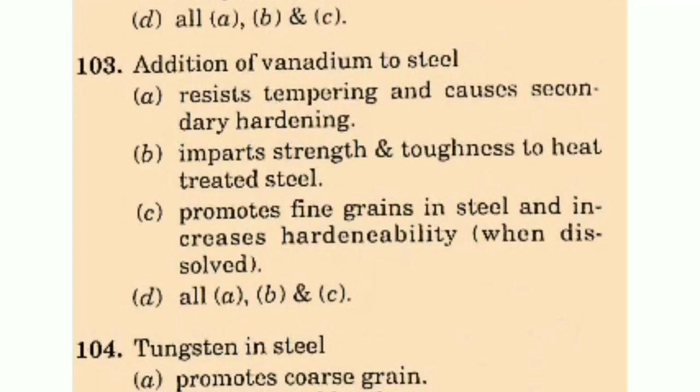Addition of vanadium to steel resists tempering and causes secondary hardening, imparts strength and toughness to heat treated steel, promotes fine grain in steel and increases hardenability when dissolved, or all of above? The correct answer is all of above. Addition of vanadium to steel resists tempering and causes secondary hardening, imparts strength and toughness to heat treated steel, promotes fine grain in steel and increases hardenability when dissolved.

Tungsten in steel promotes coarse grain, decreases red hardness, increases strength at elevated temperature, or increases corrosion resistance? The correct answer is option C, increase strength at elevated temperature. Tungsten in steel increases strength at elevated temperature.

Presence of manganese in steel counteracts brittleness from sulfur, increases ductility, contributes to strength and hardness to a much greater degree than carbon, or increases weldability? The correct answer is option A, counteract brittleness from sulfur. Presence of manganese in steel counteracts brittleness from sulfur.